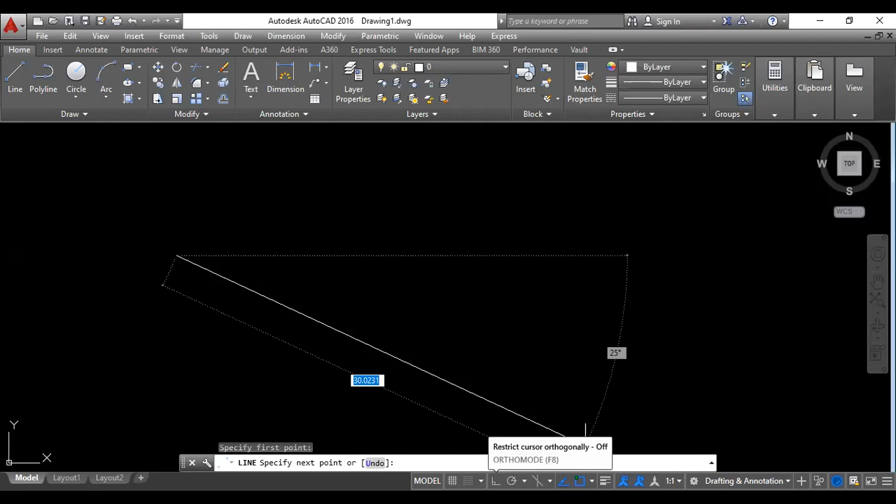In the mouse you have 3 buttons: left, right, and middle. Once you click, you can move the mouse and see the value of how much the length of the line is, but it is not restricting you to either horizontal or vertical. In order to restrict it, switch on ortho mode, shortcut key F8, or click here directly.

Now the lines are restricted in horizontal and vertical way. Type your required value from the keyboard and press enter. To exit the command, press escape. Now I have drawn a 20 unit line. This is the way to create lines.

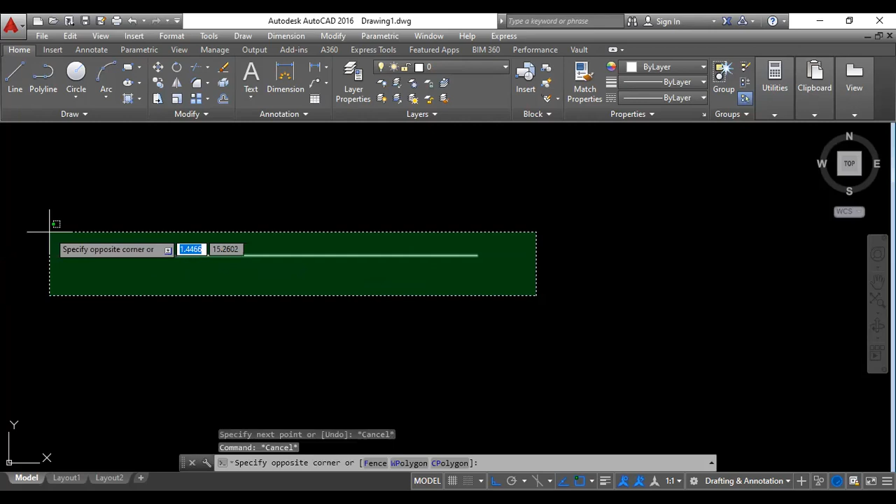In order to create a rectangle with 20 into 10 height, I specify the first point, then give the value 20 and enter. No need to click again. When I specified my first point, that was one left click. Then I just type 20 and press enter. Now I should go upward.

I move the mouse upward and give the value as 10, enter. Now again left side, give the value as 20, enter, and come down. You will get an end point here. Even if you come here, you will get the midpoint here. This triangular shape indicates a midpoint, this square shape indicates an end point.

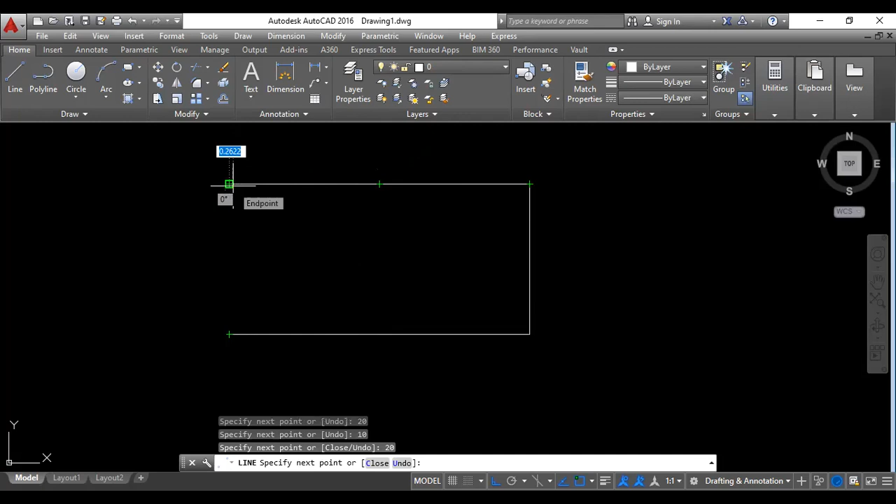So till now I have not defined any point, that's why the line is continuing. I will click over here to close this and just press the escape key.

Identification of geometrical points like end point, midpoint, and for circles the center point and quadrant, all these snapping points can be identified if you have object snap on, OSNAP. This is called OSNAP on, and the shortcut key is F3. Even we have some settings in OSNAP also.

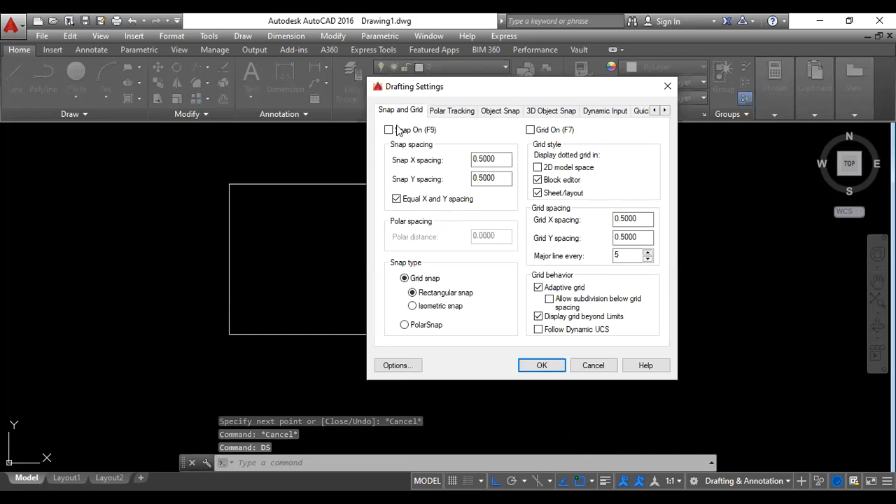For the setting, we can go for DS enter. This is called drafting setting, DS enter. If you go to DS, you will get snap and grid tab, polar tracking tab, object snap tab. Under object snap, all the geometrical reference points are there, like endpoint, midpoint, center point, geometrical center point, extension point, tangent point.

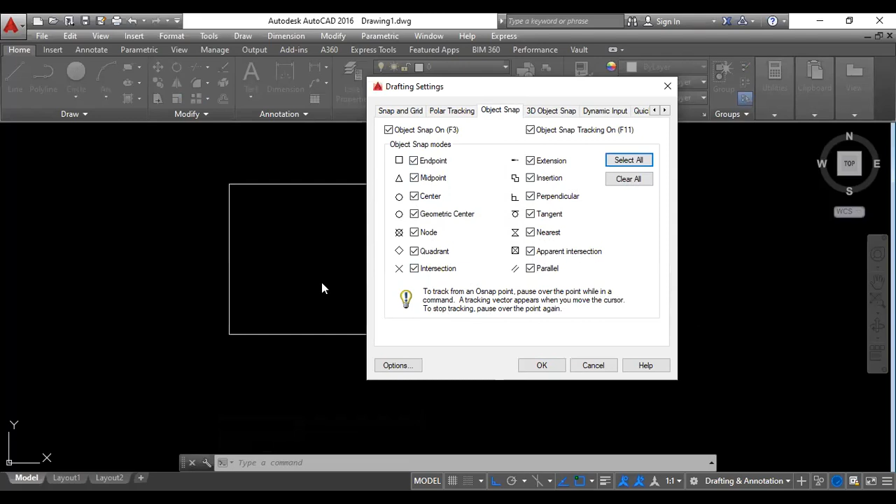So you can control the identification. If you don't click the midpoint option, even if your OSNAP is on, you won't be able to identify the midpoint. Ensure it should be checked here. You can clear it based on your requirement, select your points, or go for select all and keep it like that, then click OK.

Done. This is drafting setting for OSNAP. Even in future we will learn some more settings in that drafting setting only. So till this, I think we have covered, right?

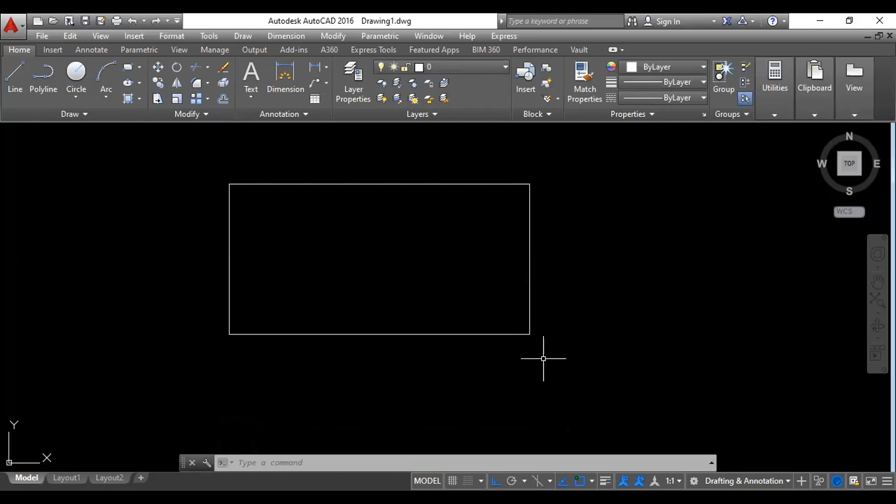Now we should start with a new command. First, let me teach you the circle command, how to create a circle. Or else we can go with the same figures I have shown you before. Let me show you again.

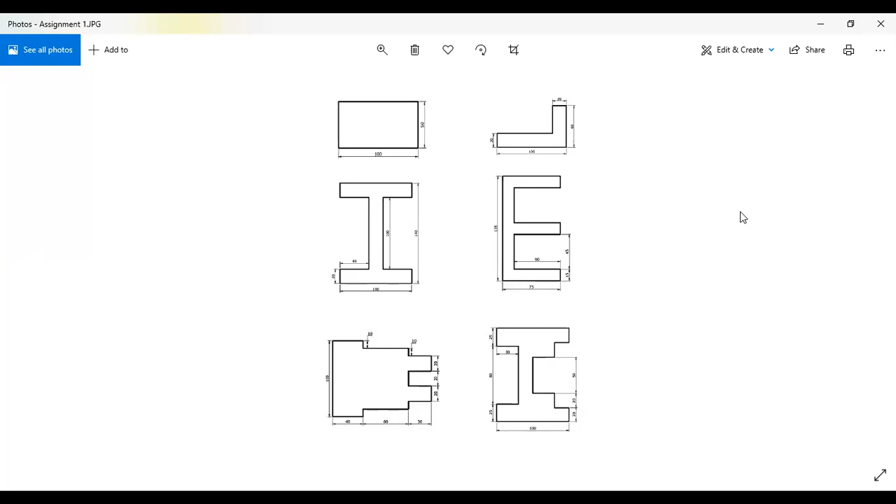Can you see these figures? Now consider this I section, or you can consider this second figure. Already you have done it, I think. This height is 20, this is 100, this is how much it is, 60, this is 20 again, like that only it is there.

Now I will tell you one command, it's called the offset command. The command line for offset will be O enter. O enter is the command line for the offset command.

What is the purpose of this offset command? The purpose of the offset command is to create parallel objects at a certain or specified distance. Suppose I'm having a straight line here and I want to create a straight line with the same length parallel to this line, with a distance of 10 units.

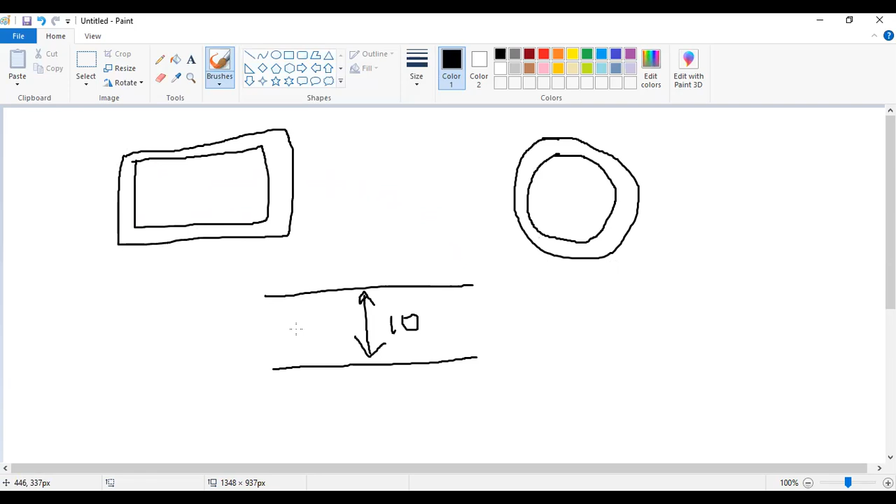Even if you take a rectangle, though I haven't taught you how to draw a circle and rectangle yet, still I am telling you. If you want to go outside the rectangle and create the same shape at some specified distance, you can create it. So the command will be O enter, as I told you, and it belongs to a modification tool, not a drawing tool. Of course you will get it in the modify menu bar. As I told you, if I go for the line command, I get it in the draw menu bar, but since this is a modification tool, you will get it under the modify menu bar.

I will show you. So now, if you give O enter, as per logic, what will it ask? Specify the offset distance - it will ask you to specify the offset distance, how much offset distance you want to specify. Once you give the offset value and press enter, it will ask you to select the object you want to offset.

Once you select the object, you have to click downside to create the line downside, or upside if you want to create the line upside - anything. Or if you have a vertical line, left or right, wherever you want, you just click over there, in that side only.

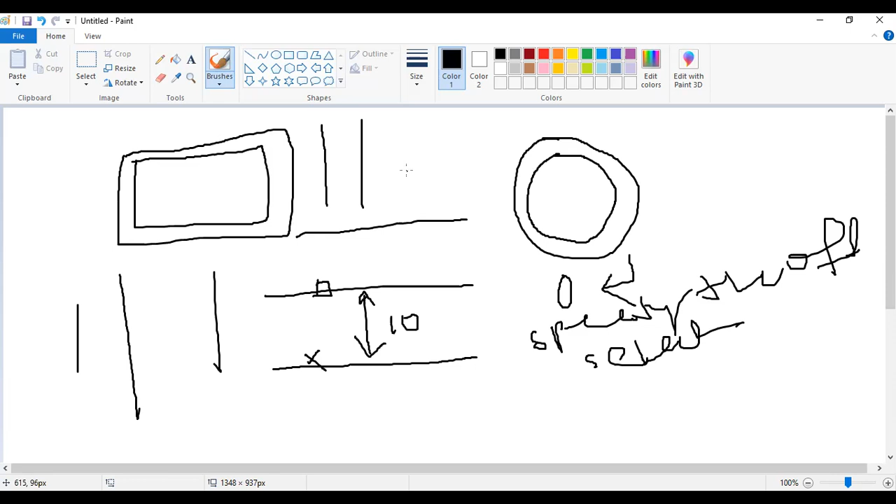If your value is the same - suppose this is a line and you have created an offset value here, and the same line is there - you want to create the same value line or same distance line again, you can just select it and create it, select it and create it. But if your distance is varying, if you have a different value for distance, then you have to come out from the command by pressing escape, and again go for O enter, give your new value, select the object and do accordingly.

So this is the purpose of why we use the offset command. The command is O enter, and you will get it under the modification panel or modification menu bar. I will show you in the software.

Now we are here. As I told you, offset command - see, home tab, modify panel, this one is your offset. Or if you go for the modify menu, you will get the offset command. Either you can type O enter, or click on that icon in the modify panel, or go to the modify menu and click on offset.

I will go for the command line, because now we need to remember the command. So, O enter. Now you can see it is asking to specify the offset distance. Even along with the cursor, it is showing the prompt. Specify the offset distance - but still now I have not created anything, so I want to create a line.

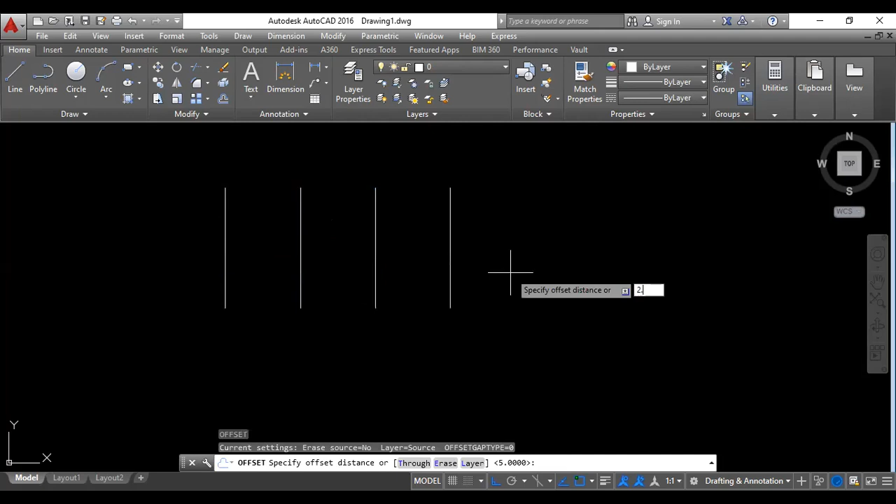Select, select. If you want to change the value, press escape key, O enter. I'm giving a new value of 2.5, enter. Now again select the object here, select the object here, select the object here. Like this you can create.

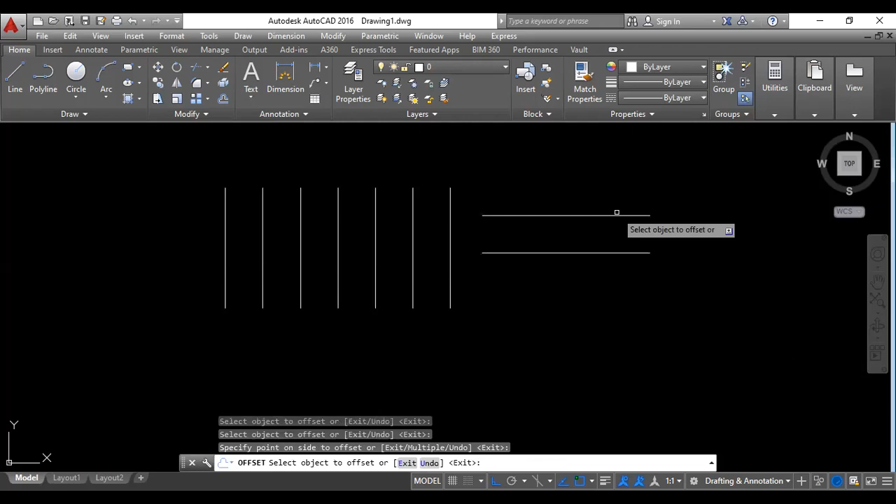Even if you have a horizontal line, O enter, now again 2.5, enter. Select, if you will just select upside, it will create upside. Again select, if you click downside, it will create downside. Like that only you can create.

Again, if you want to change the value, press escape, go to the offset command, give your new value and select your object and do like that only. Even I'm showing you circle also. Don't worry about the circle, I can create it, I will teach you.

O enter, let one enter, 1 unit. Select this. If I come inside, it will create inside. If I come outside, it will create outside. The distance will be 1 unit.

The same thing with rectangle also. If you have a rectangle, then again O enter, 1 enter, select it. If you go outside... don't worry about the circle and rectangle, don't focus on that, I'm just showing you the concept.

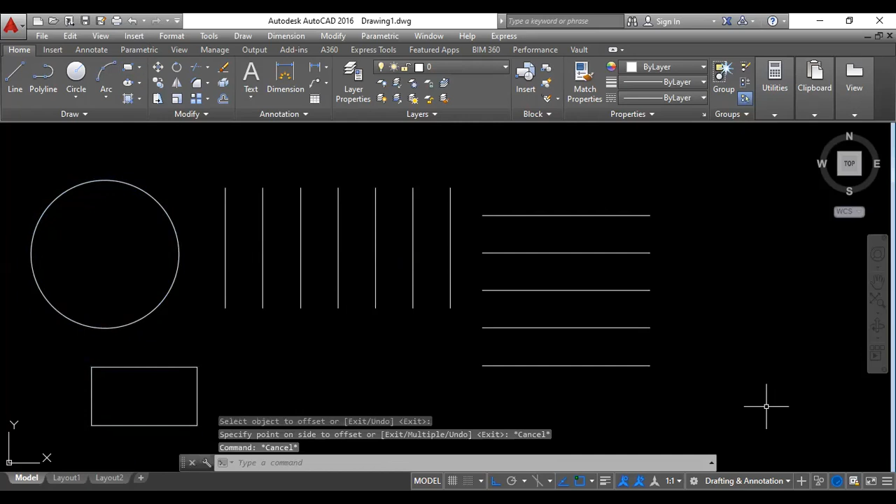So delete. Now how can we apply the same tool in our drawing? Just have a look at your second drawing. The length is 100, the height is 60, and you have 20 distance, I think, horizontally and vertically both.

So let's see carefully. Line command, I'm taking the base as 100. I'm taking 100, enter. Now it is coming, meaning it is out of screen. For that, what do I have to do? Who can tell me? Anyone who can tell me what I have to do now? Now I am out of screen.

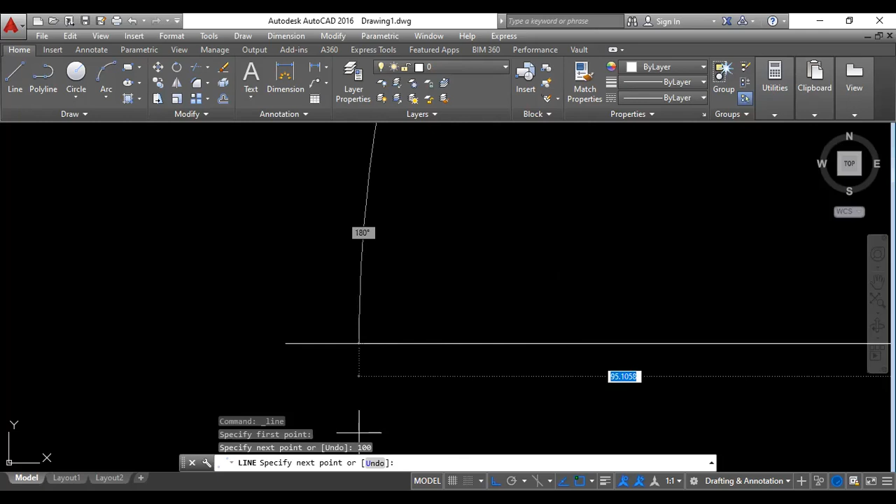Use the scroll button. Yeah, I can use the scroll button, so it will help me to zoom in and zoom out, isn't it? And to come out from the command, I can press the escape button if I want.

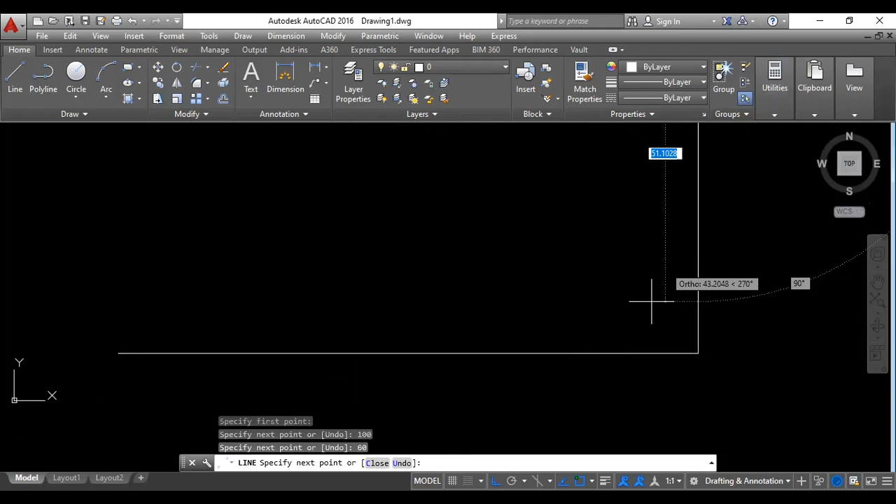Otherwise, I can continue with the height 60. Let 60 enter. Now it is stuck. If I'm still trying to scroll it, but it is not working more, just press escape, again scroll. Just press escape, again scroll. Now it is there. So till I have created, this is 100, this is 60 I have taken.

Now you can see from here, one line will be there at 20 distance. And from here, another 20 distance is there, isn't it?

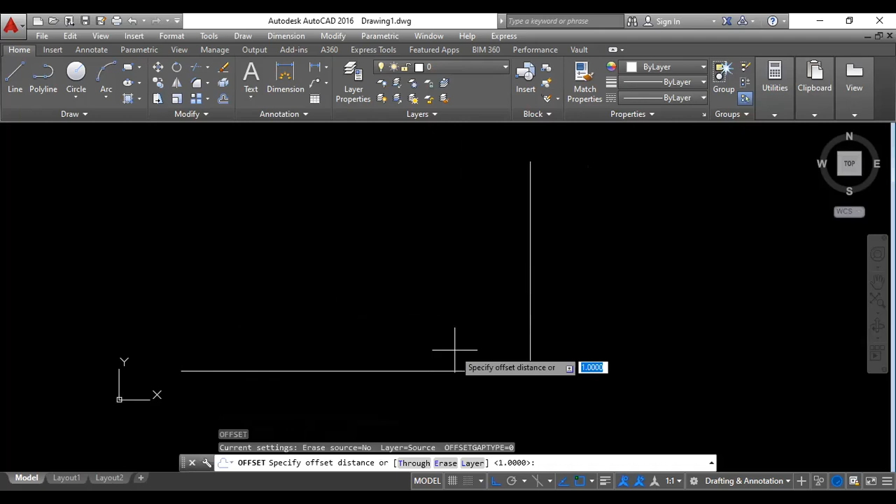So let's go for the offset command, O enter. I am giving the value as 20, enter. I'm selecting this line and coming upside. Again, I'm selecting this line, coming this side. And press escape.

Got it? Or if you have any doubt, let me know. Sir, the lines are intersecting each other. It's okay. Till now, if you have any doubt, ask me.

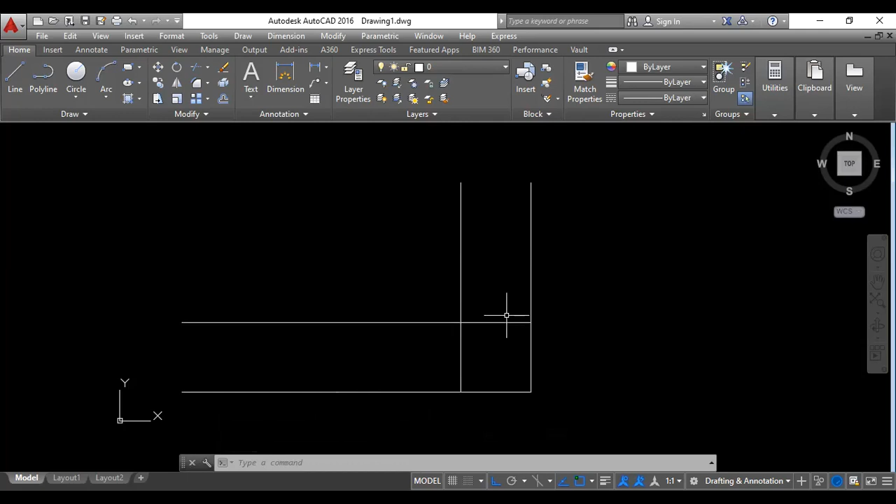What I did, just I have taken the base as 100. This one is your 60, isn't it? And I have offset both the lines at 20 distance. So again, I will go to the line command to close this loop.

Only endpoint to endpoint. Now, this is our constraint, isn't it? So I have a command called trim, in order to trim out the extra part in the drawing.

Trim command is tr double enter. It's better that you should go with the command tr enter. Or same thing you will get under here, this is trim, and if you go to the modification toolbar, you will get the trim option. Or if you go to the modify menu, you will get trim.

Or I am going for tr double enter. Just see, I don't want this part, I don't want this part. Done.

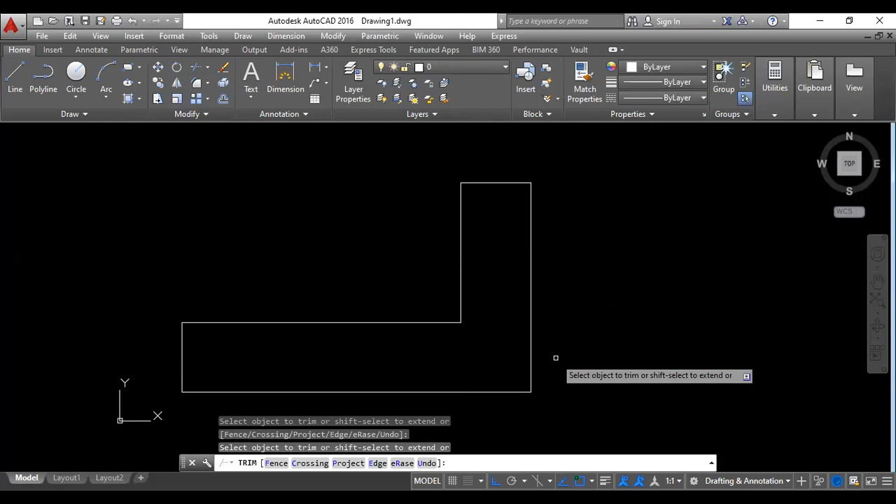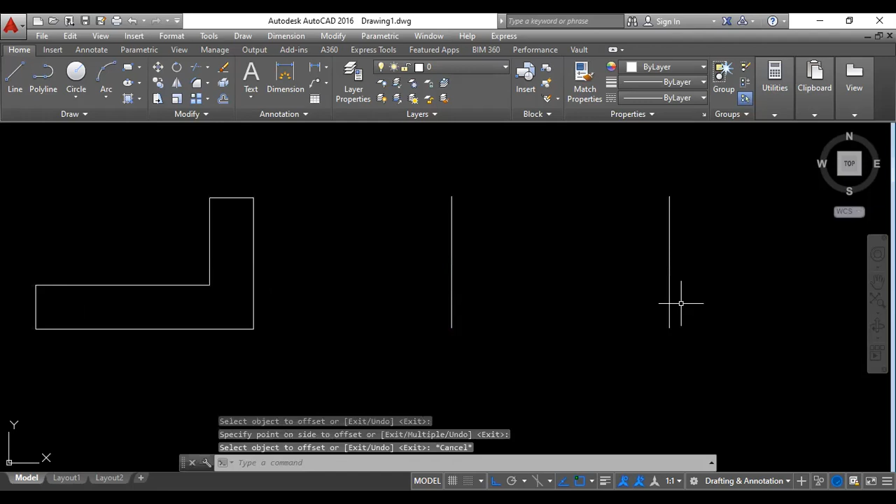Even the same drawing I'm doing with a different method, using offset only. Let me take a line with 60 distance. From here to here it is 100, enter. From here to here this is 100. Press escape, O enter, 20 enter. I'm taking this to here. Again line command, here to here. Then O enter, 20 enter, this one, this one. Now go for TR double enter, select this, select this, select this, select this. Done the same way.

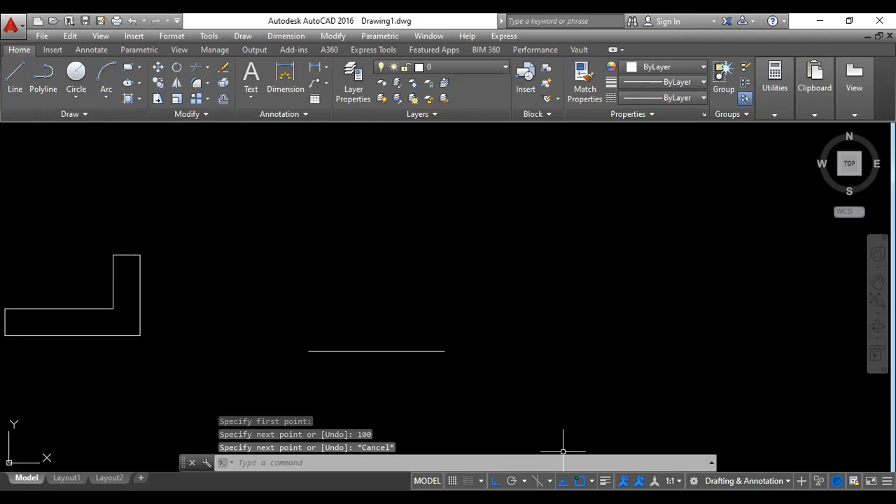If you will see the drawing, let me go to the drawing. You can see this total height is 140. This distance is 20, this distance is 20, right? Here it is 40. Same here, it is also 40.

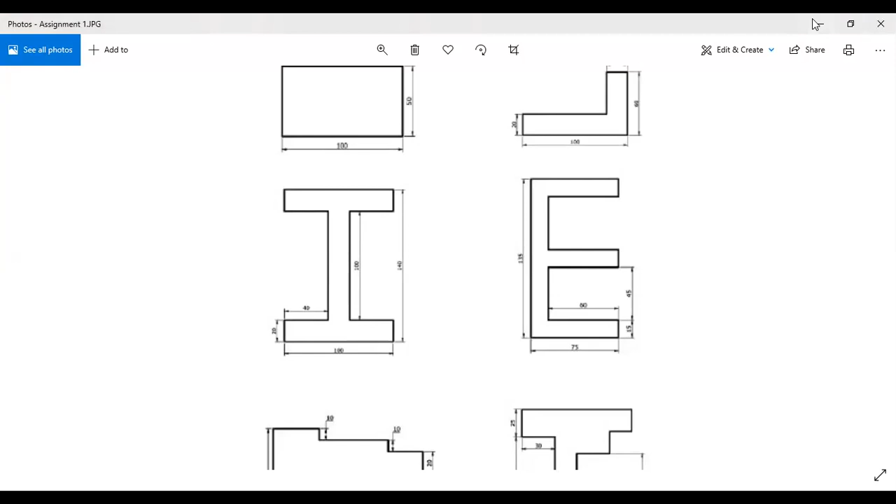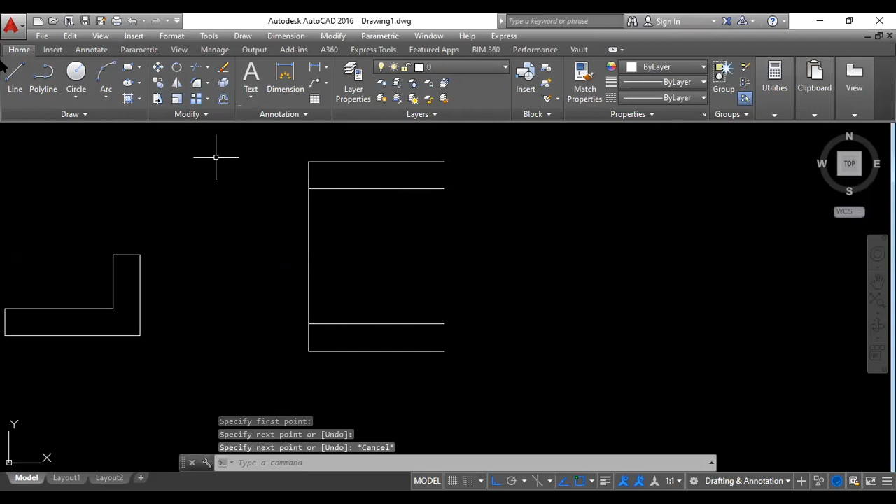Come back to AutoCAD. What I am doing: O enter, value will be 140, enter, select this one, come to this, escape. Again O enter, 20, enter, select this, come upside, again select this, come downside, escape. Line command, just close down this end to end. This is end to end. Now again O enter, 40, enter, select the line, come to this side, select the line, come to this side.

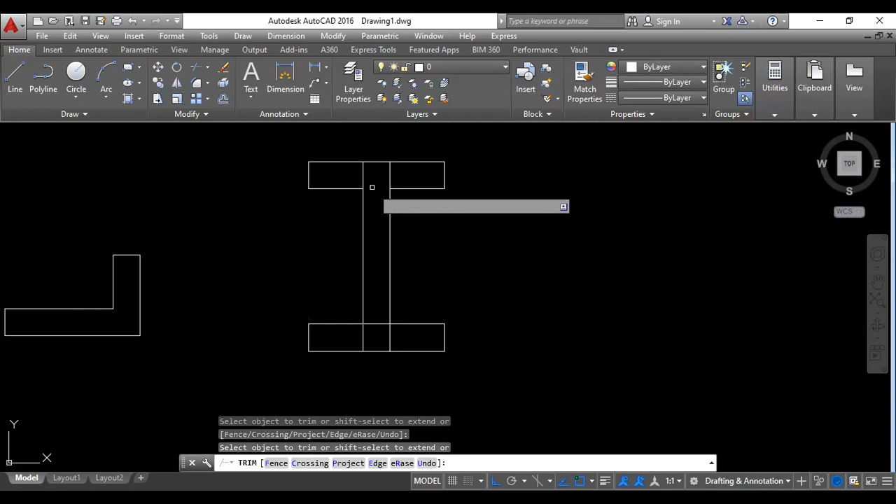Escape. Now TR double enter, just select the extra parts, whatever you are thinking. Only by deleting the extra parts will you get your required shape. Escape to come out from the command. Got it now?

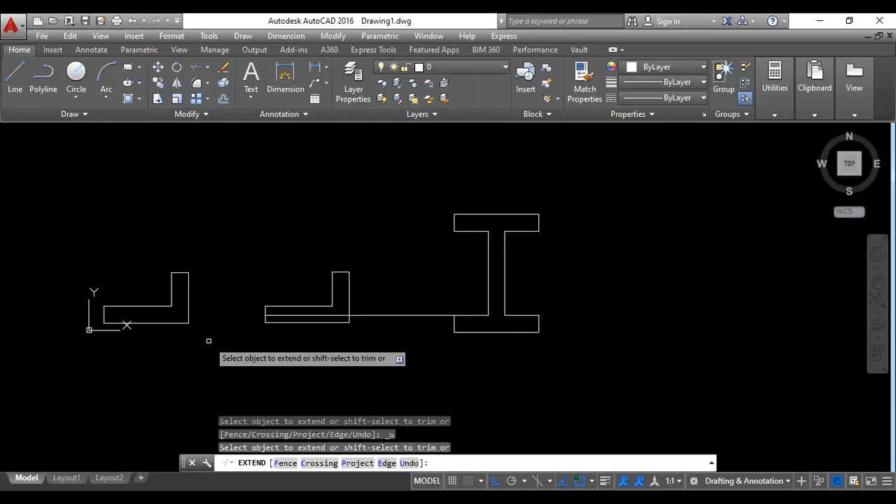See, just I am undoing this by pressing Ctrl Z, or you can go for undo redo here also. Or I can extend here up to this, here also up to this, like this only I can extend. See.

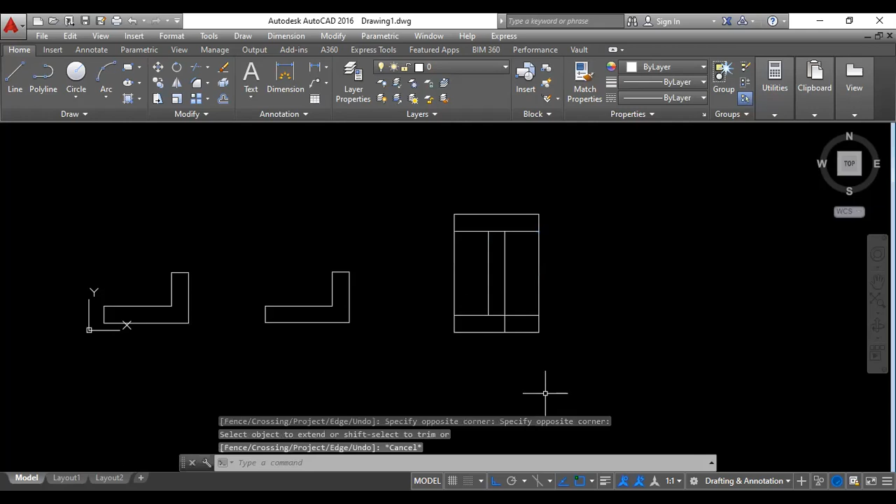So this is extend, opposite to trim. Trim is to trim out the extra part in the drawing. Extend goes up to some reference. If a reference doesn't exist, you will not be able to extend that one. So this is about trim, extend, and offset command.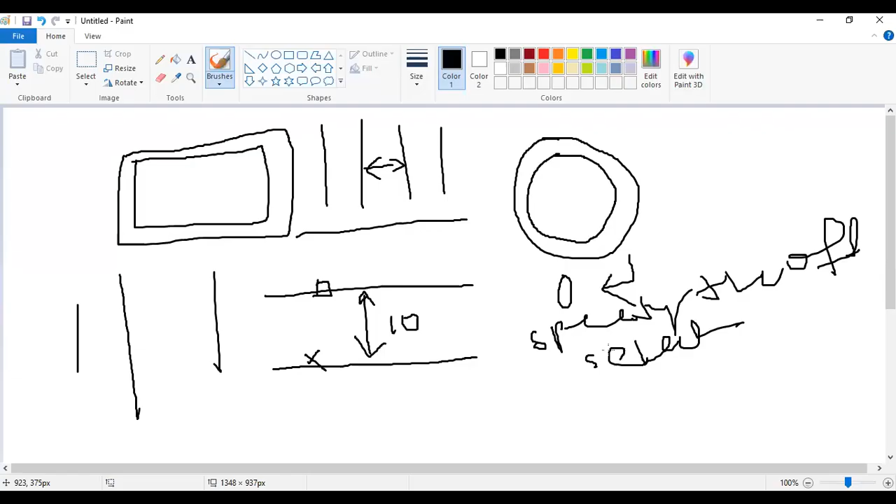So next, come back to your drawing tool. It's called circle. Let me go with a new file, new.

See, there are 6 different methods to create a circle in AutoCAD. Just let me write down the options. What are the methods available? So I want to go with a notepad file.

Open the notepad. Which one is it? Okay, this one. See, for circle, the command line will be C enter, or you will get all the 6 options in the menu bar as well as in the ribbon. So it is better for circle that you go with the ribbon or menu bar option. Don't go with the command. Even you can go with the command, but it is easier to go with the ribbon or menu bar.

So there are 6 different options to create a circle. The first option is center and radius. So if you have the center point and the radius value, you should go with this option. If you are given center and diameter, center point and diameter value, then you can go with this option. Now you might think, sir, if radius is given we can calculate the diameter, and if diameter is there we can calculate the radius also. Then why are both options there, isn't it?

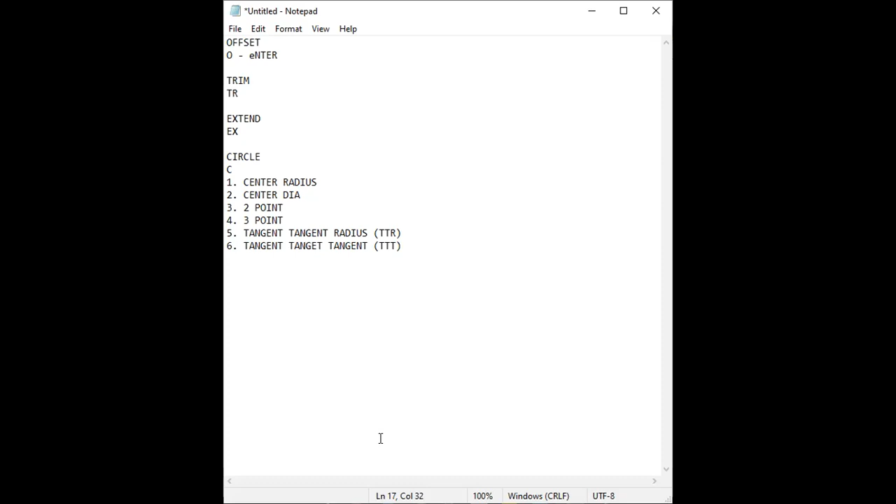So I'm talking about the circle, coming back to this. Center radius, you know. Center diameter also, no need to define further - it will ask you the center point and to define the radius value, or the center point and the diameter value. For 2 points, if you give any 2 points, it will create a circle, and by default those 2 points will be the diameter for that circle.

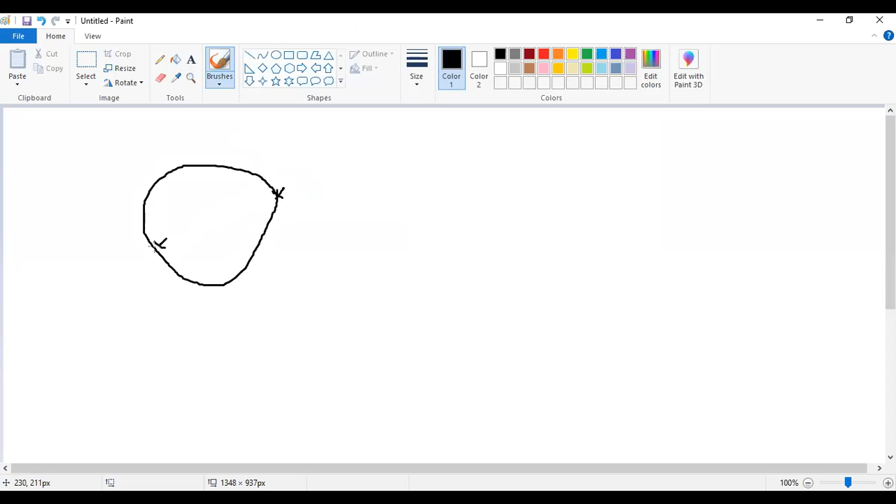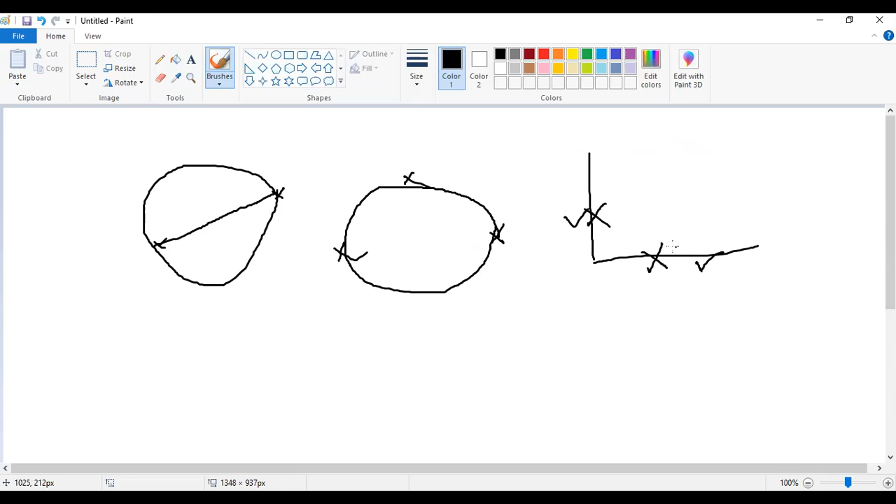For 3 points, any 3 points you can click as per your application, and it will create a circle. Now tangent radius: either you have 2 lines - this will be your first tangent, this may be your second tangent, or if this is first, then this is second - and if you have a radius value, it will create a circle like this.

Or else if you have 2 circles and a radius value, in that case also you can create a circle like this. So this is your first tangent, this will be your second tangent. So this is tangent, tangent, radius.

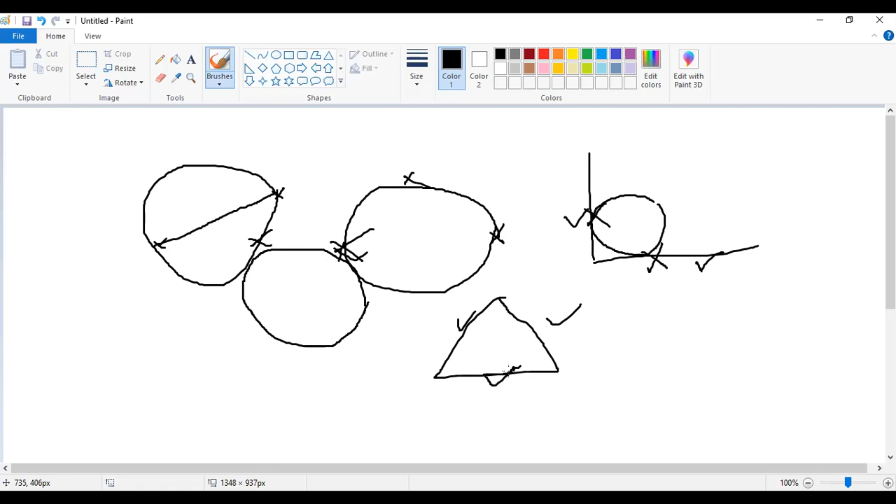Then if you talk about tangent tangent tangent, suppose I'm having three circles like this, or three lines like this. So this is your first tangent, second tangent, third tangent. No need to give any radius or diameter value - it will create a circle like this, which will touch all three.

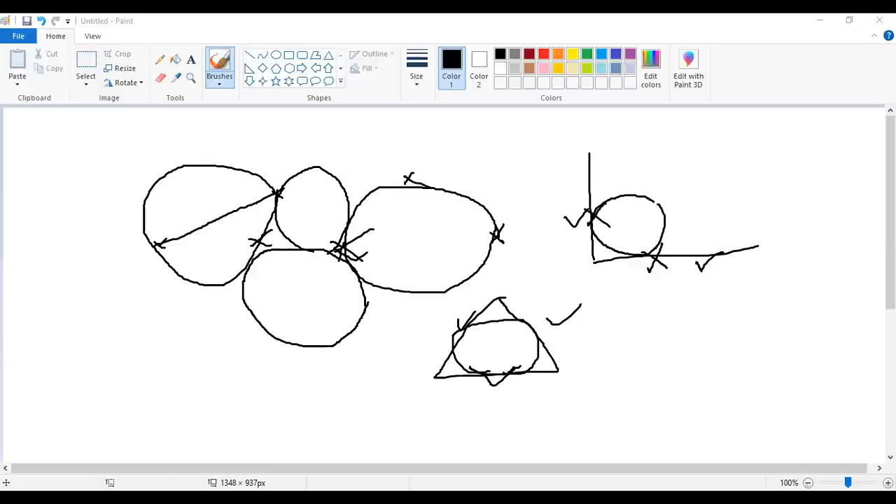Understood? Yes sir. Okay, let me give you some examples.

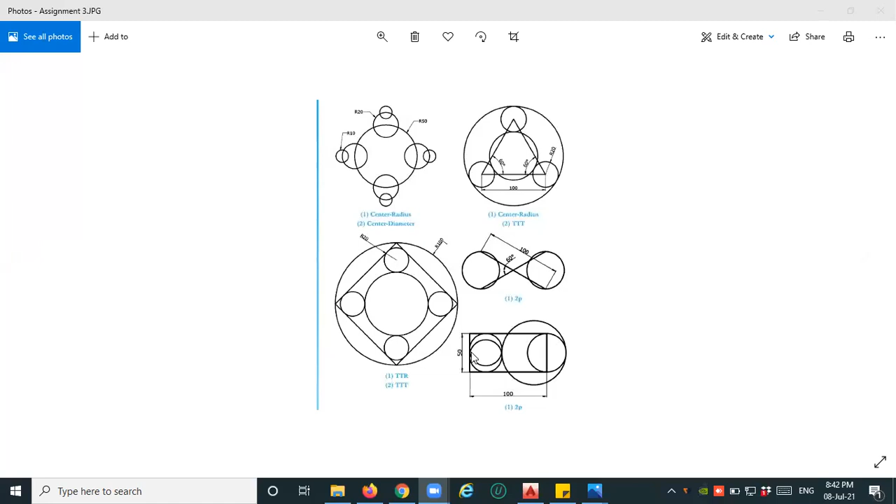Let me give some example. One minute, huh? Yes. Can you see this? Yes, sir.

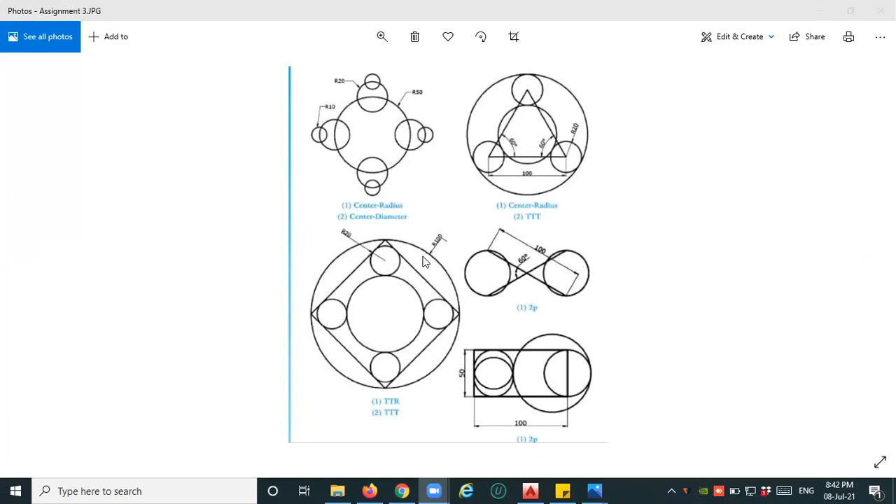Now let me show this. Here also 60 degrees is there. It will be difficult for you to create 60 degrees now. Okay, don't take this one, I'm taking this one. So the outer radius is 100. How much is it? 100. Okay, let me create this.

What I can do is go with the snipping tool. I'll go with the new one.

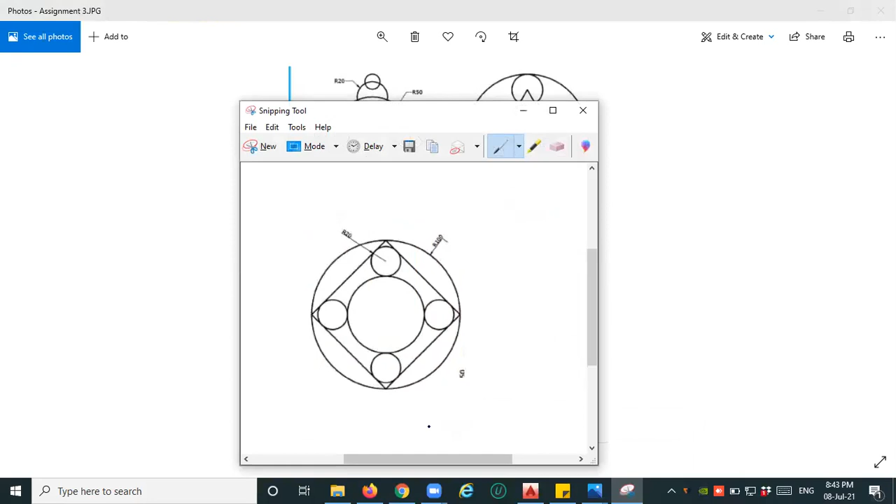Control copy. I'm coming back to AutoCAD. Share it. Control V. Here let it be.

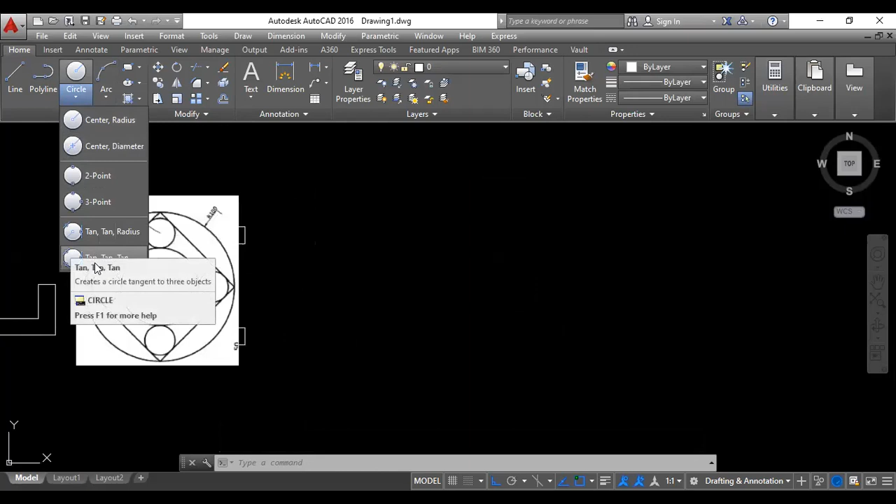So what I can do is go with the radius R100. If you go to the circle command, you can see there are 6 methods: center radius, center diameter, 2 point, 3 point, tangent tangent radius, and tangent tangent tangent. The same options are available under draw if you go to circle, or you can go for center too. Anyone you can choose. First I'll go with the center radius method. This is the center point and the radius value is 100.

Enter. Okay, now another square is here. So I can go with the line command. Just from this quadrant, you can snap the quadrant also, this is called quadrant. Click here, first point, come to this quadrant, click it, come to this, close down here and press escape key. Got it? Now here R20 is there.

Explain again. Which one? Just now what you did.

Like I did a circle, I did 4 lines. After the circle, I just took the line command and started the line from this quadrant. If your OSNAP is on, as I told you, all the geometrical reference points you will get. So these are 4 quadrants you will get in the circle. You start with one quadrant, click, go to the next quadrant, click, next quadrant, click, next quadrant, and close it down and press escape key. Done.

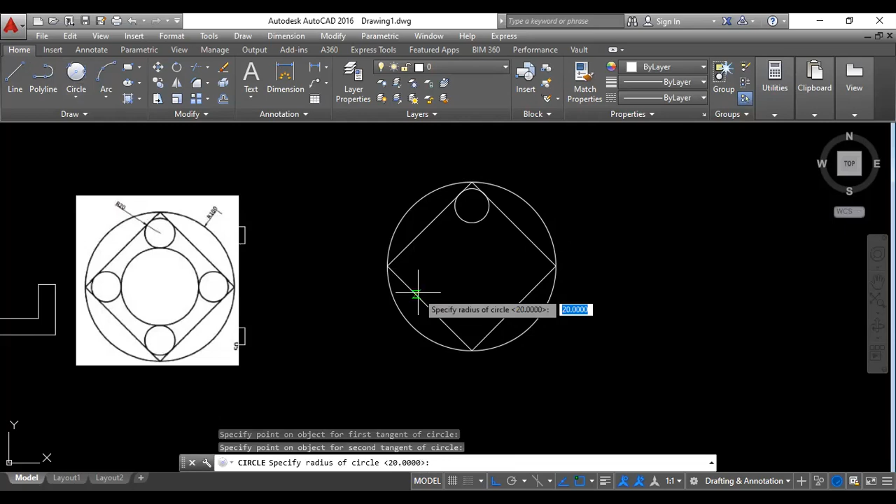Enter. I will follow the same for all these three. Again go to tangent tangent radius: this is the first tangent, this is the second tangent, radius value 20. Again tangent tangent radius: first tangent, second tangent, radius value 20. Again tangent tangent radius: first tangent, second tangent, radius value 20.

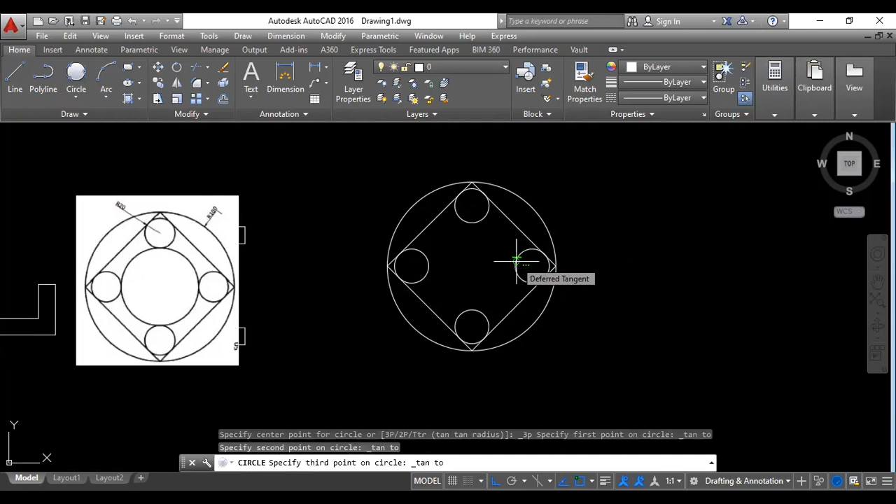Now the last one will be this one. If I go with the tangent tangent tangent option and select any of these three circles, automatically it will touch the fourth circle also. Got it?

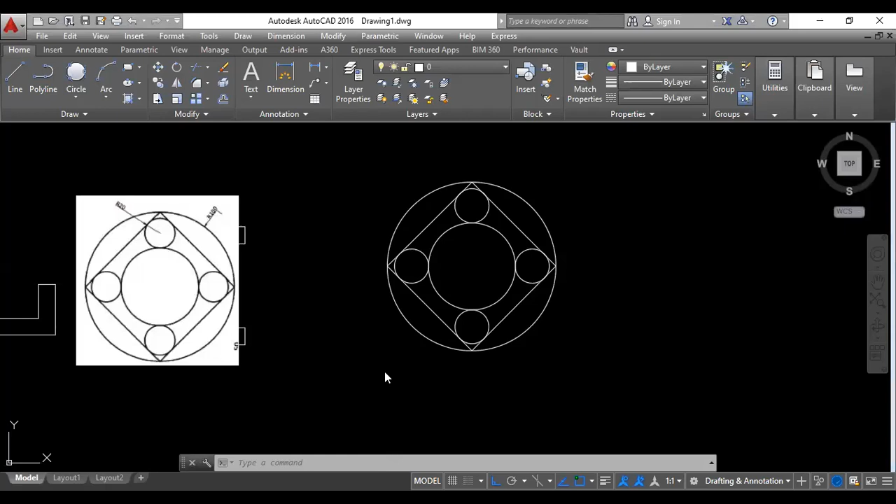I'm just taking another example for you, something a little bit complex for you people right now. So I am taking this example.

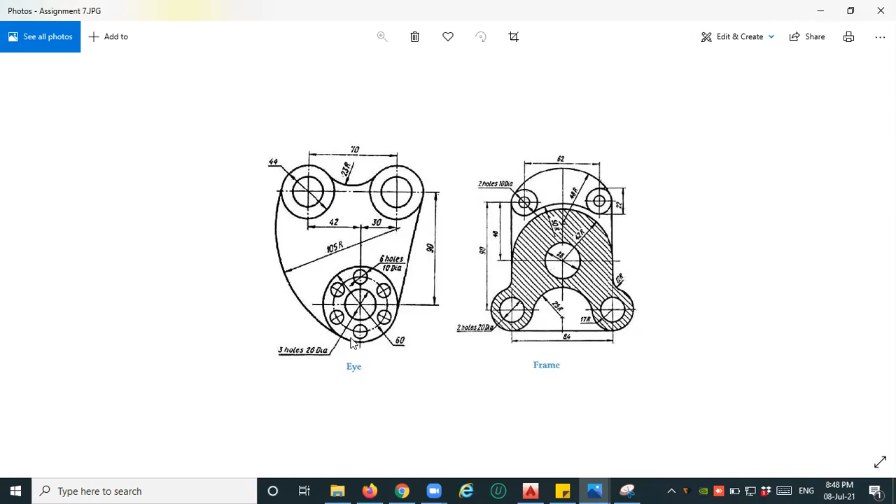Okay, now I should take it in the snipping tool. Let's go to new. I'm taking this in snipping tool, copy and paste it here.

Even here some mistake is there. See, this distance is showing 70, but here it is given 42, 30, so it is total 72. This type of mistake you will get in the drawing, so don't worry about that. We will maintain this 42 and 30, we are not considering this 70.

Okay, in this figure, what I can do is go with the line command. I am taking a random line, creating it anywhere. Now this distance is 90, so I am offsetting this line, O enter, with a value of 90, enter, selecting this to here, escape.

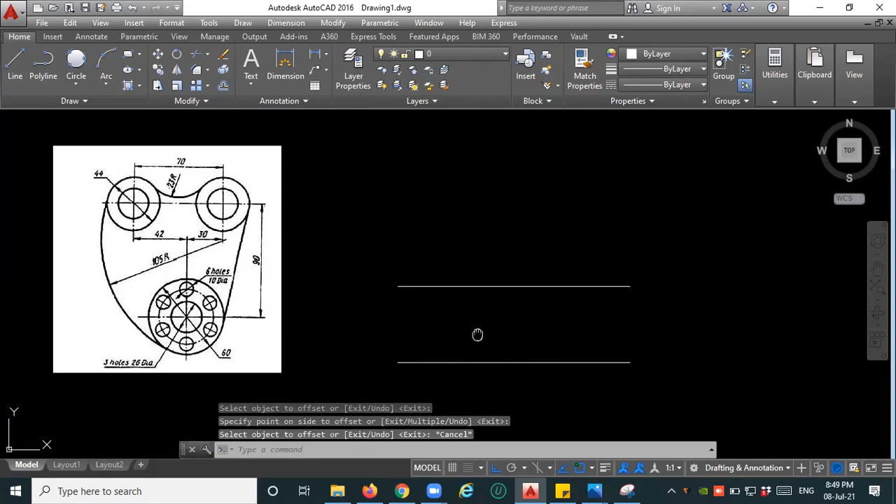Okay, now I am going to the line command. From midpoint to midpoint, I am creating another line so that I can offset this 30 and 42 value in order to get the circle center point. If you have anything like this, you just have to identify the center point for the circle by creating lines and offsetting with the help of offset.

Now see, this is the center point for this, and this is the center line. I will offset this line 30 on the right side and 42 on the left side. So: O enter, 30 enter, select this, come to the right side, escape. O enter, 42 enter, select this, come to the left side, done.

Now easily we can create the circles. This is a 26 diameter circle, so here it is 26. Again it is 26.

Okay, I'm telling you the copy command also. The copy command is CO enter, just for duplication purposes. For copy, the command is CO, the first two letters of copy. Or else you can go to the Modify menu, where you'll get the copy option.

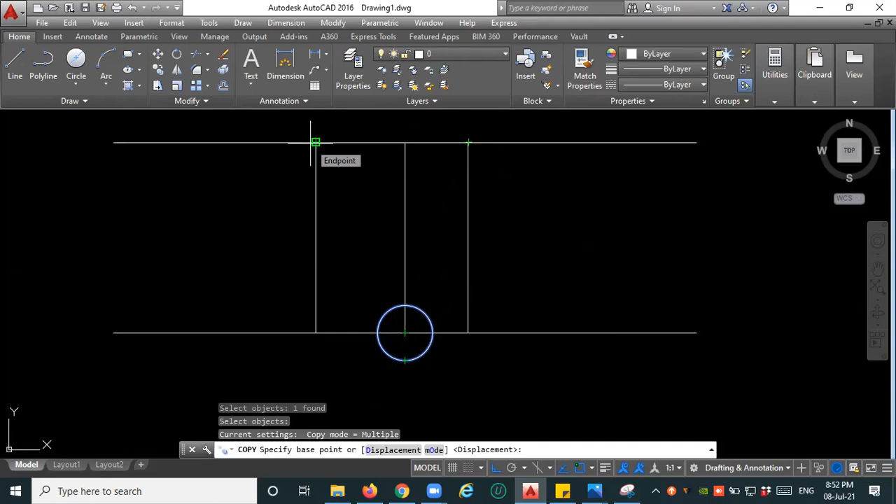Now it is asking to specify the base point. The base point is the point I should identify so that it will be easier to place it in other places. Now see how many geometrical reference points are here in the circle: 4 quadrants and 1 center. I think if I take this center point as my base point, it will be easier to place them here and here, since all 3 places need this 26 diameter circle. So I will identify this as my base point.

Click here. This is copied and placed here and here. Just press escape to finish this. Got it? That's the copy command.

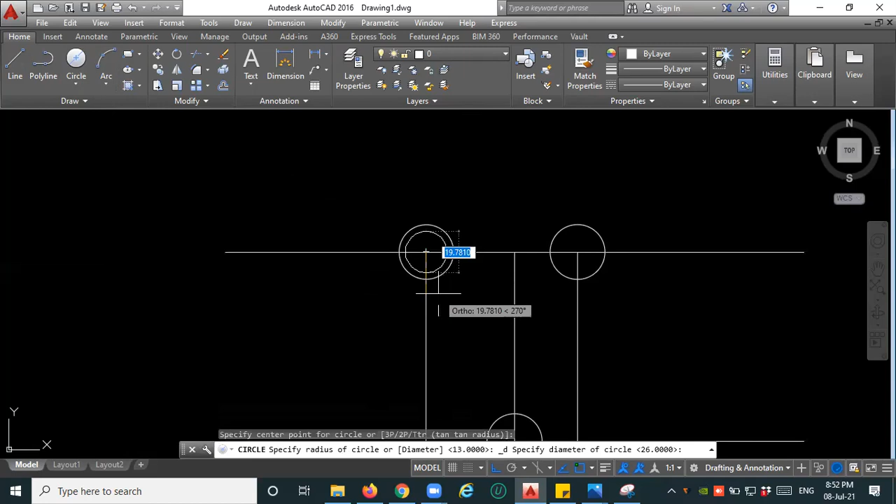Yes sir, now again there's 44. The diameter is 44. Select here. The diameter is 44 here, and the same circle I want here also.

So let's again go to the copy command, or you can create the same diameter again, but that will be tedious since you'd have to go to circle and create it again: select, enter, specify the base point, and specify the new point. It's not mandatory that you always take the center point as your base point; based on your need, you can change your base point.

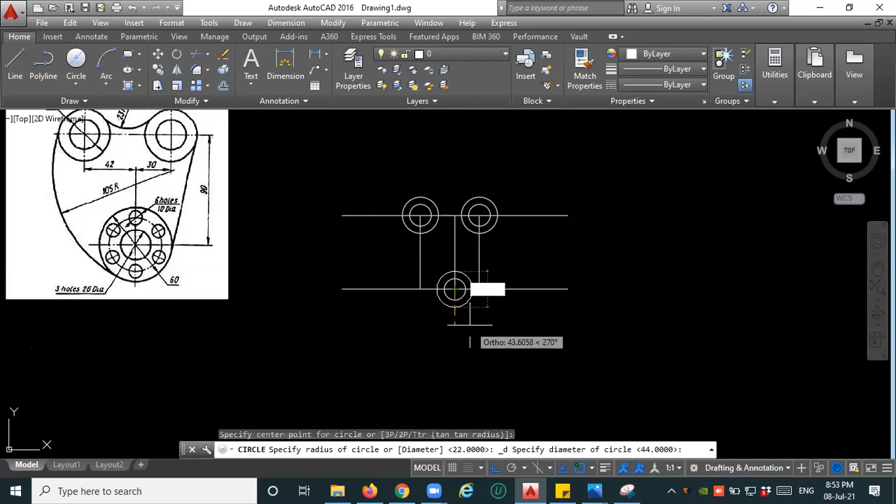Now here another 60 diameter circle is there. I can create the 60 diameter circle. 60, enter. Now I'm done.

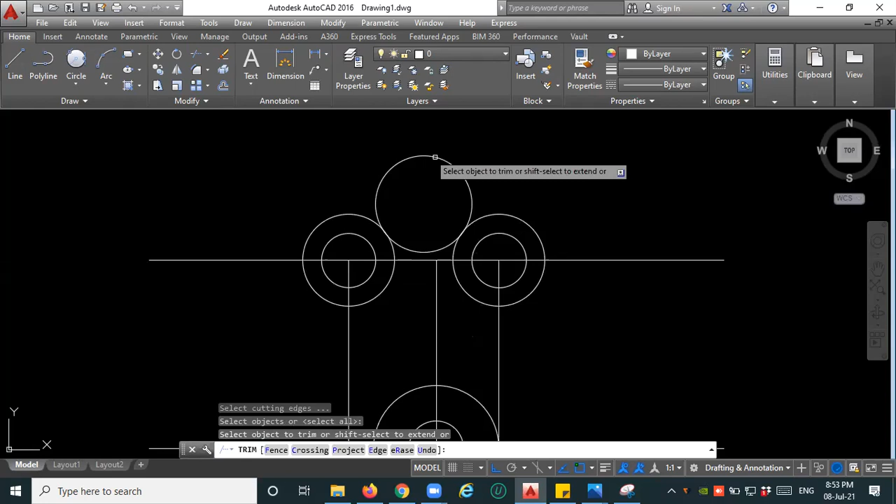Now another circle with 23 radius is there, which will touch here. Tangent, tangent, radius: this is the first tangent, this is the second tangent, and radius is 23, enter. Now this will be your extra part, so TR, double enter, I'm just deleting this. Now escape, now just delete these lines, because I took these lines as the reference.

Now you can see another circle is there, 105, which touches this and this. Tangent, tangent, radius, touching this and this, and the value is 105, enter. You can see...

Here some trick is there. If you go with the tangent radius option and touch randomly here and enter the value as 105, you see the circle is like this. Even here the same condition: it is touching this circle, it is touching this circle. So you need to identify an approximate position, not the exact point. You can see here it is touching, here it is touching, not exact point, approximate point you need to define.

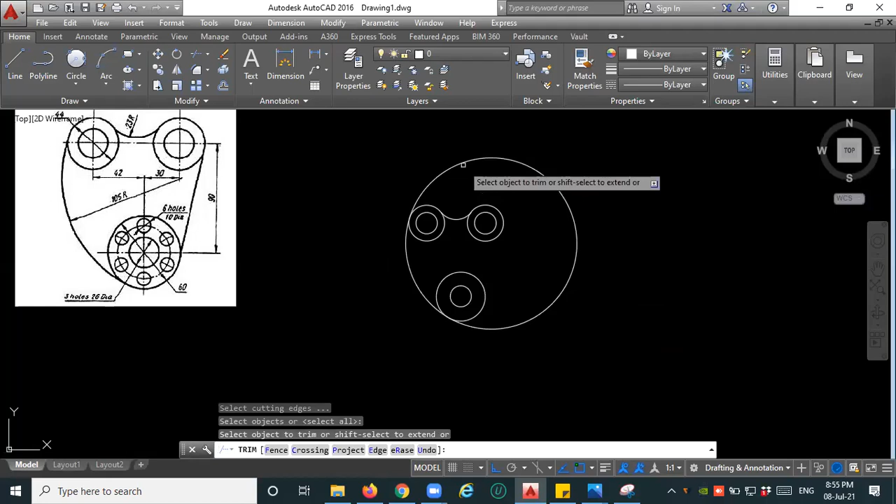Like if I'm going to the tangent radius, instead of taking this side, you should go outside, this side, this one, and give the value as 105, enter. Now trim, TR, double enter, trim out the extra part. Escape. Now if I go to create the line, you can see this line is tangent to both circles. So if you go to line, you will not get tangency because it is showing the nearest point, the quadrants, and all these things.

So how can I identify the tangency? It is quite difficult to identify the tangency here. That's why I can go with the drafting setting command, DS, enter. Under OSNAP, I will clear all the other options and only keep tangents on, then click OK.

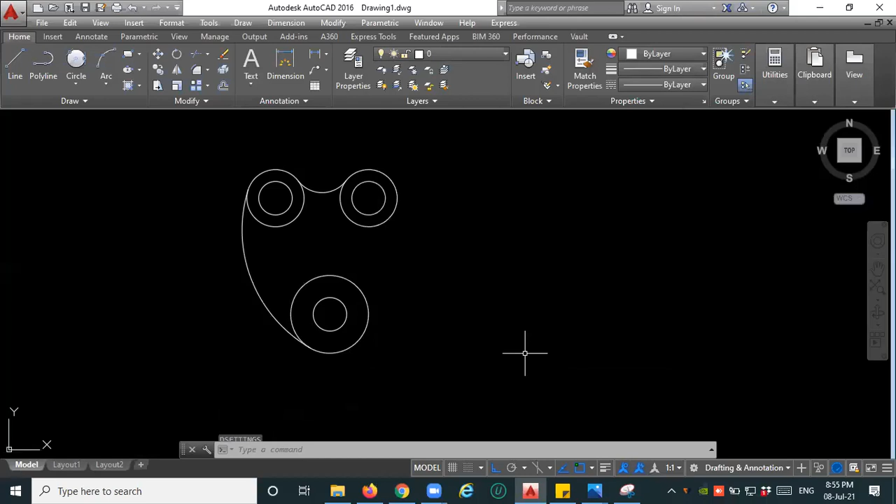Now with line, wherever you click, it will show you the tangent. Wherever you click, it will take the tangent. And press escape.

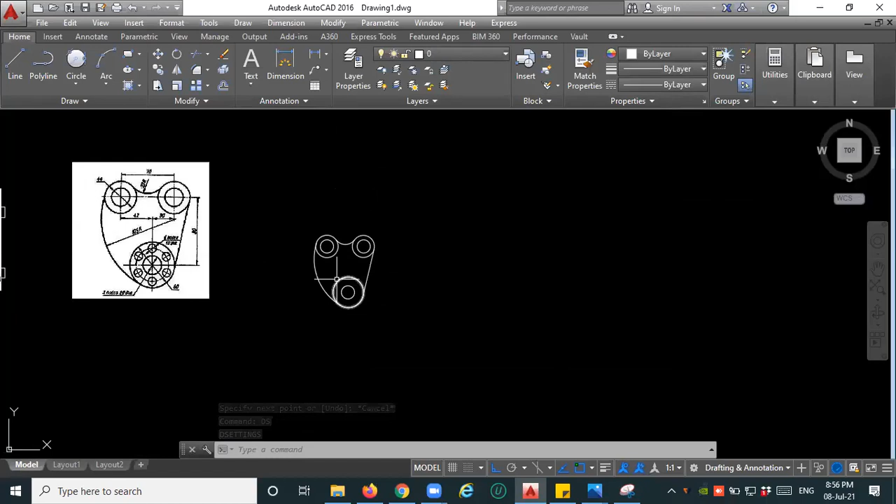Just remind yourself, come back and do all the things again, select all and keep OK. Otherwise in further operation you will not be able to identify or snap the reference points. Make a practice: if you switch off all the reference points under OSNAP, then you should go back and select all again. Otherwise in future you will get problems identifying the reference points.

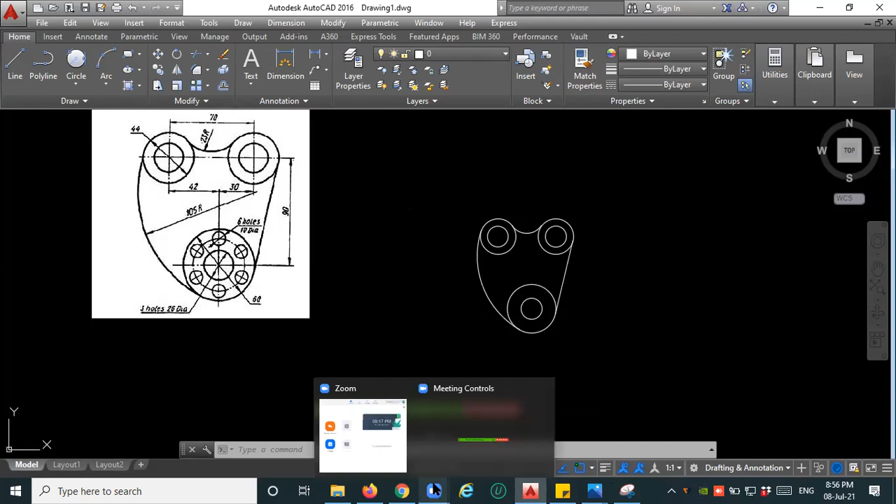So this is how we have created this with the help of line, circle and all the things. There are n number of drawings with the same type of examples. I'm showing you this one.

See, this is also the same like this. Here circles are there with some distance, here with the distance given. Here this is tangent radius, here also this is tangent radius. This one is also there. Some same thing is there.

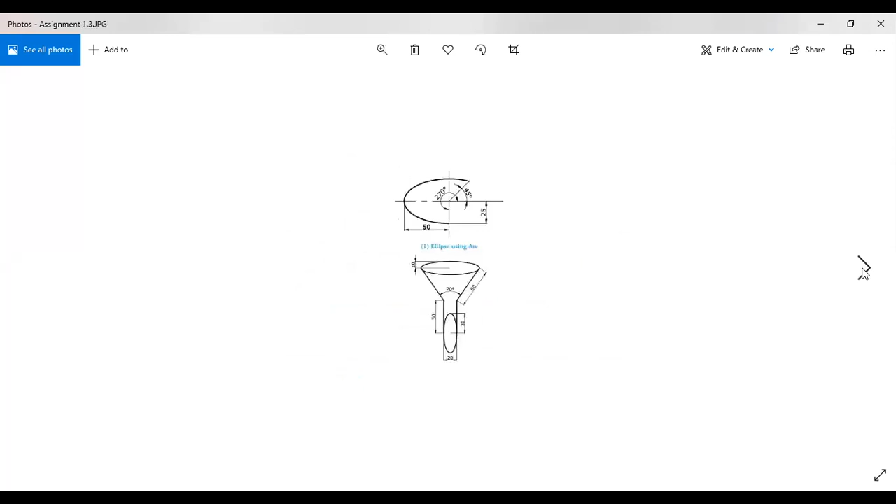Even I will show you more options also. One minute, huh? Yeah, this one.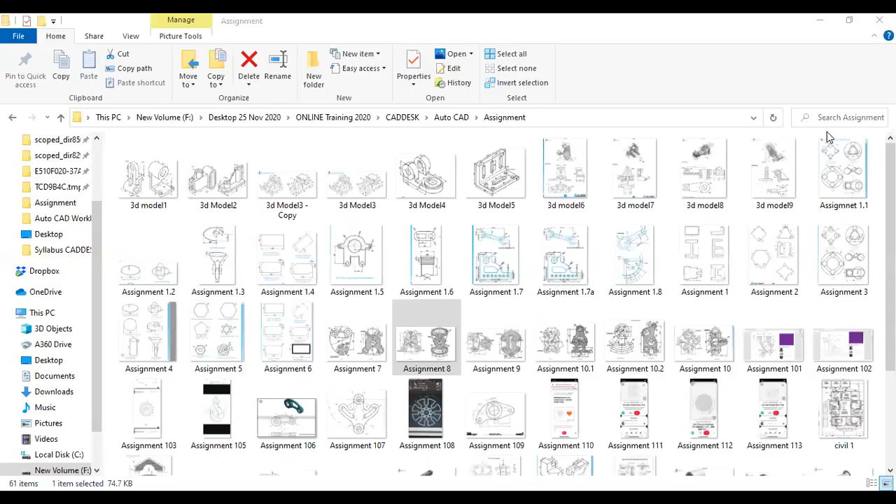See, these are more drawings like this. This all can be done through circle commands. Don't worry about these patterns, I will tell you later. This is also can be done through circle commands.

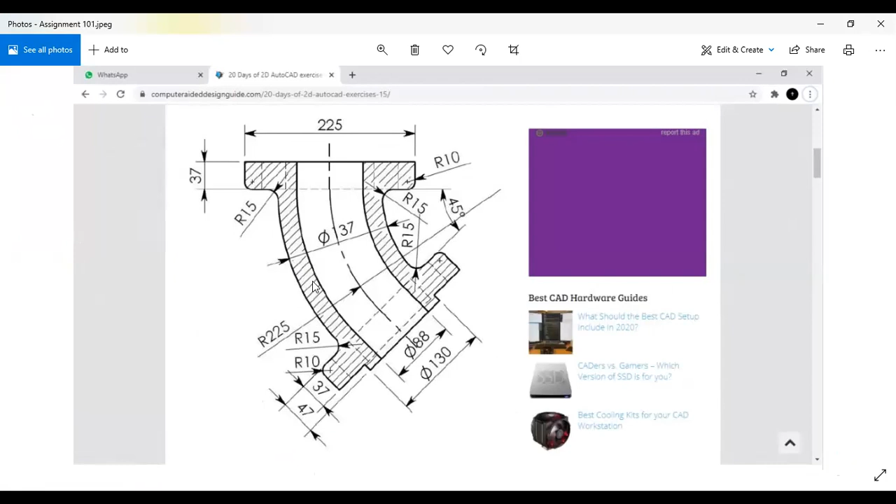But here some angles are there. Till now I have not taught you about the angle, so don't worry about that. Done?